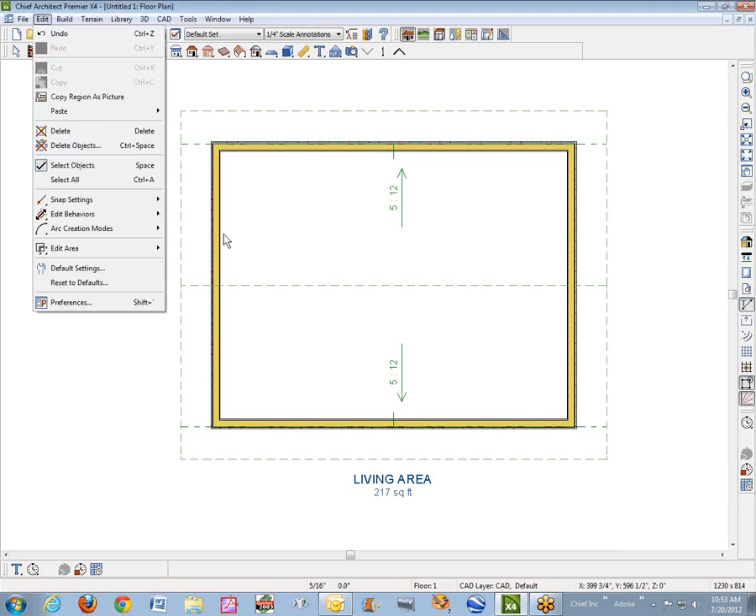Several things you need to do to get an open rafter, open eave kind of look. You don't have to have gable roofs, but the first thing you do is set the framing up. That's under Edit, Default Settings, Framing, and Roof Framing.

We want rafters to appear to be 4x10s, 48 inch on center. I'm going to get back to whether we have fascia or not later in this tutorial, but that's what I've got set up there.

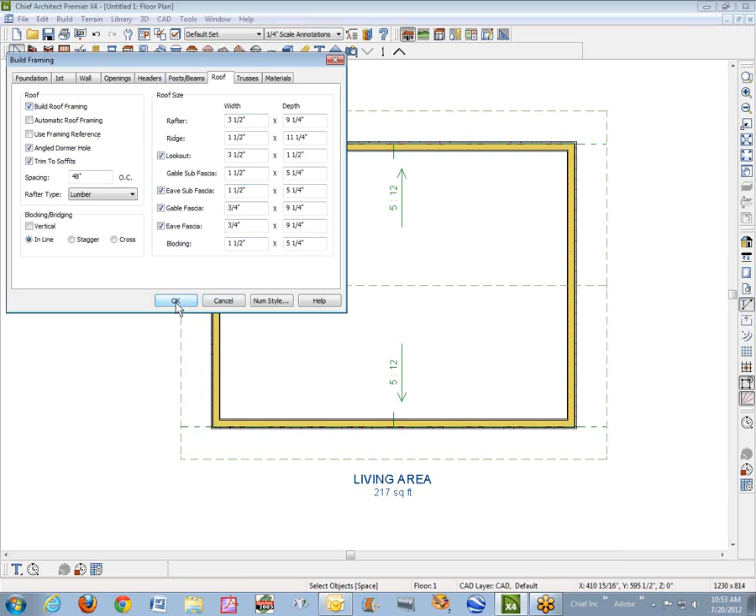Then we'll build framing. Now some of these methods I use to open dialog boxes aren't significant, but the actions are. We'll build the framing, yeah, I want it to show. Okay, so there's the 48-inch on center 4x10s.

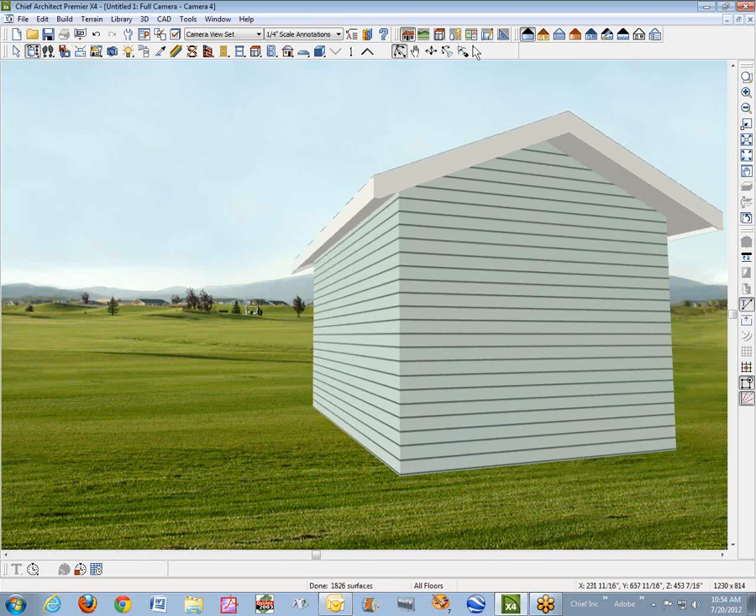Let's just take a camera view at this. Now the framing's there, but it's not showing. You can see that there's a fascia reveal there. Let me go to a vector camera. Okay.

So I'm going to open this dialog box of this roof and go over to, excuse me, the Options tab. This is what I missed when we were together before.

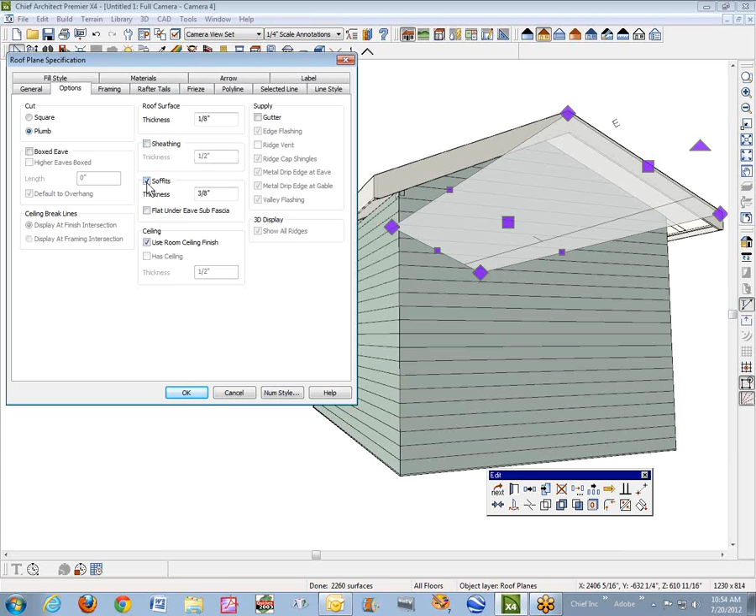I'm going to leave the sheathing. Well, I'm going to turn off sheathing, soffits, and ceiling. We'll just see what it looks like. Might as well just do this. Okay, so now I can see the shingles.

Right on top of the framing, which is probably not optimum. So let's open the dialog back up. But you should know that when it says sheathing, that's precisely what it means. And I think the default sheathing is OSB.

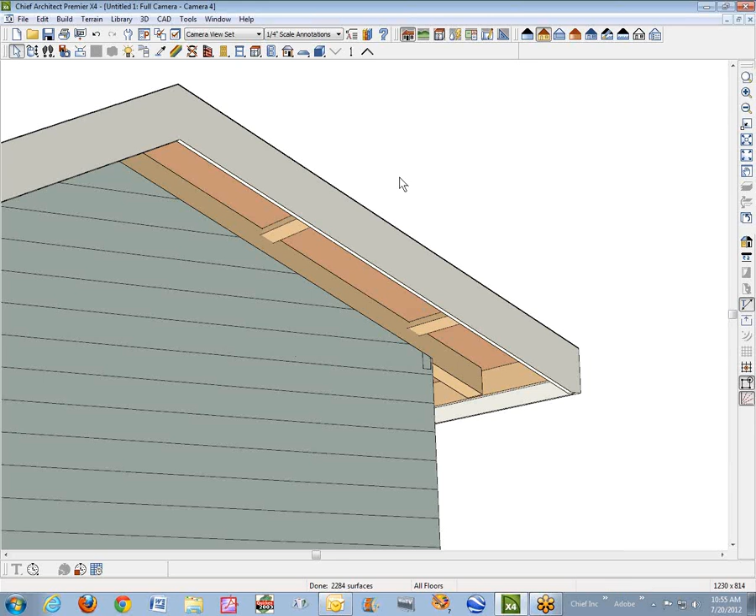Let me texture the camera. Yeah, which this is not exactly ideal in an open rafter thing where you're just doing an appearance. You don't want the raw wood and raw OSB. So...

And I don't know whether or not you want fascia, but again, that's a setting in the dialog. We'll go over here to framing and turn off the fascia. See, now it's just the framing there. There's the sheathing and the framing.

So it depends on the look that you want. On some you don't want the eave, on older things maybe you don't even want this over here. So we go back to the, see, now I'm getting the dialogue, so I have to click on the sheathing to get the dialog box open.

And we'll turn out, again, lookouts or no lookouts. Let's turn the lookouts off. You can see these little 2x4 things disappear. It just depends on what's there, what settings you use. And Chief has been kind enough to allow us dialog boxes and input boxes to control all of this stuff. So, oh yeah, okay, I want to go back over to...

All right, yeah, gable fascia we probably want. And you can't, I tried this, you can't turn on one and not the other. They just kind of go on and off together.

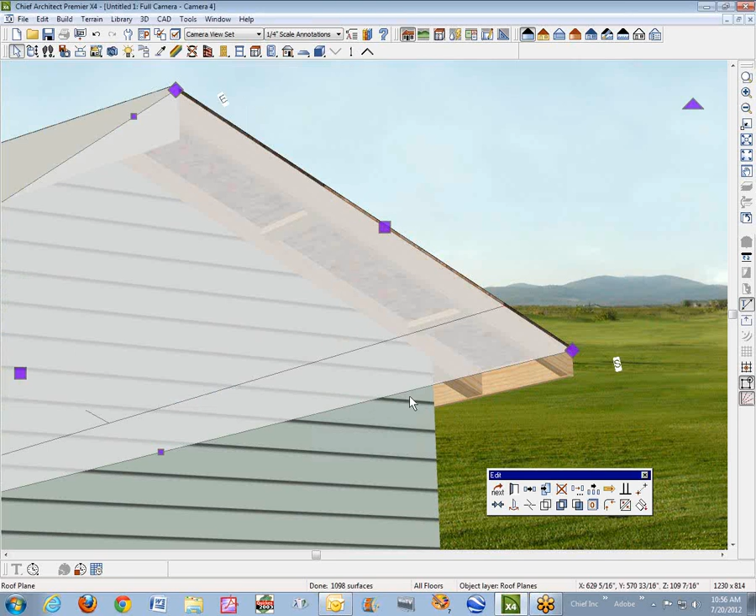So if there's no framing across the end, I would recommend you just select that piece and delete it to get that sort of look. And it looks like this piece is not 4x10, so we'll just open that up and make it a 4x.

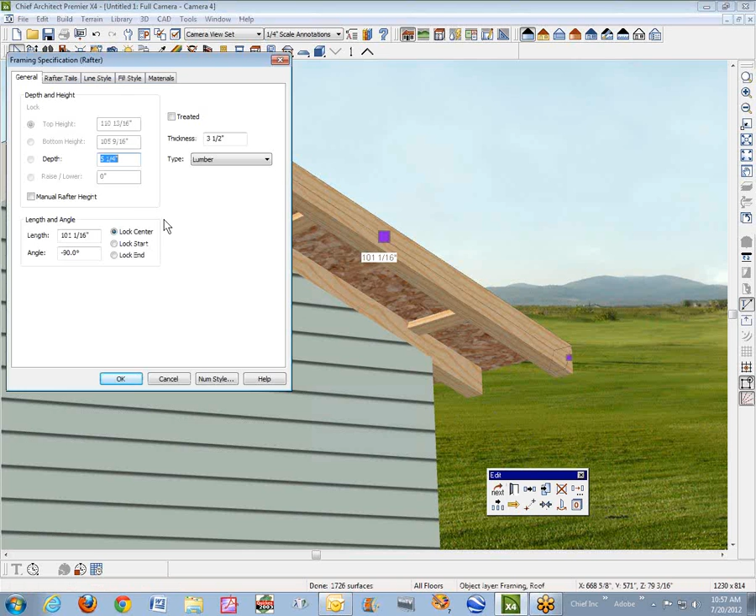I'm not quite sure what setting I missed, but now it's sticking out too far a little bit. This is how you control things to look like what you want them to look. Let's see, that's on the end of this house, and then that would be -X.

I'm going to select this and use this tool here, Transform Replicate, to move this object to the left in plan view 2 inches. I need to make it -2, don't I?

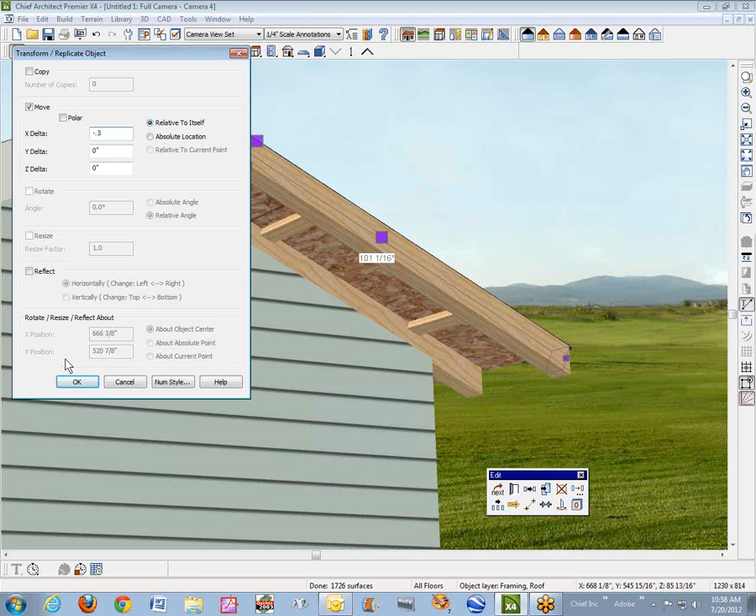Okay man, it's a little bit too much. Well, now I'll move it X 1.5 inches, see, a positive value. That's okay, this is how you get things done. You use the tools that are available. I'm going to move that back a half inch, -0.5. Okay, I'm happy with that.

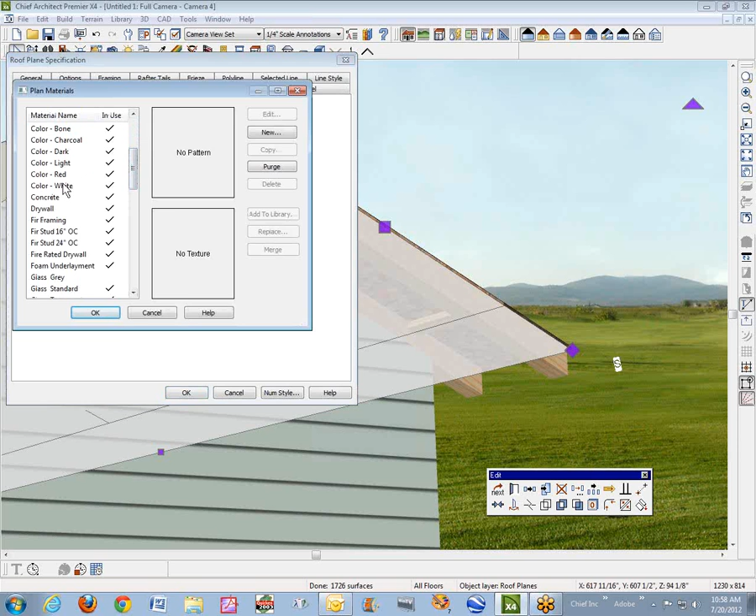Now the materials. I'm going to open this roof dialog here. I don't want it to look like OSB, so I'm going to go over to the Materials tab. Yep, and sheathing, change it from OSB to just white. If you're not worrying about the materials list, it just has to look right. That'll look better painted than it will be raw OSB.

Now the framing, I probably should have thought ahead on that, but I did this on purpose because sometimes you just don't think of all the steps in the right order. And go back to build framing. Build framing, there it is.

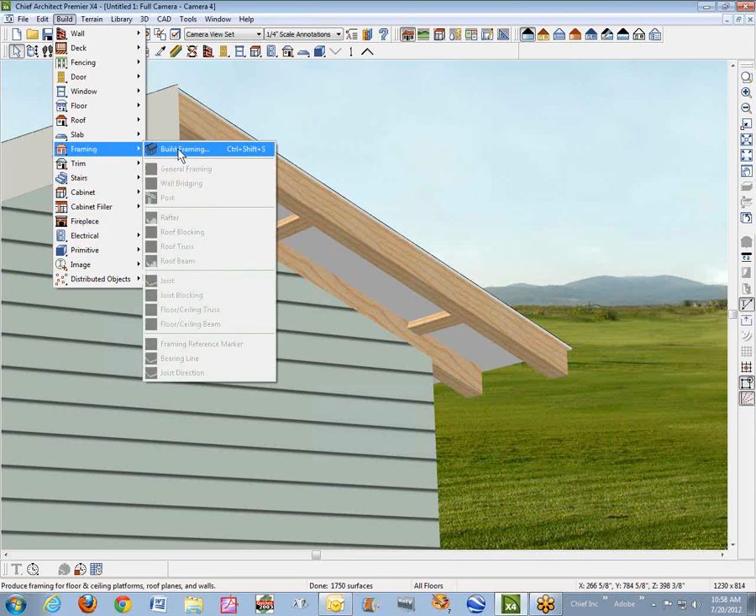We'll go over to the Materials tab for General, I'm going to change that to white. I'm not sure that this will be a retroactive setting. Well, we're fixing to find out. It is not retroactive, okay.

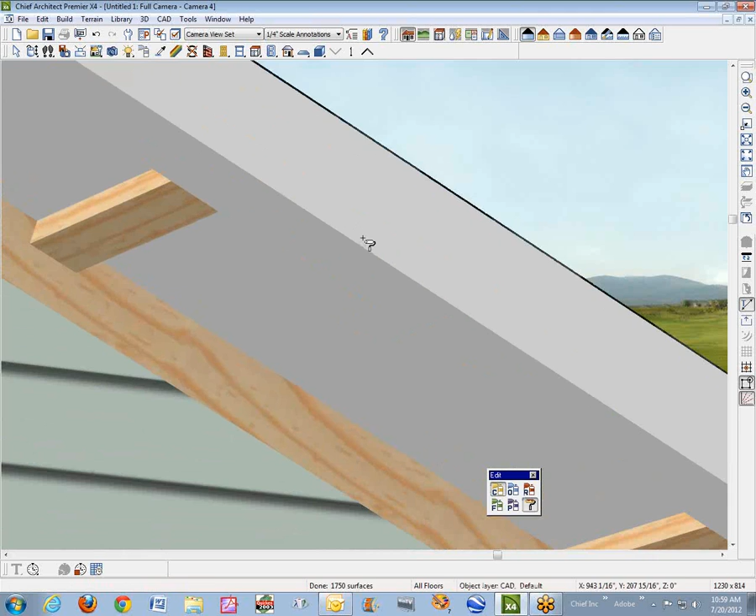So some of these things, it's obvious that it would be a good idea if you were to plan ahead. If I use the material painter, I think, okay, just put the material on there. Let me check that. I'm going to check it with the adjust material definition, see if it just made it white. No, it actually took the Fir framing and painted white onto the Fir framing, which may or may not be okay.

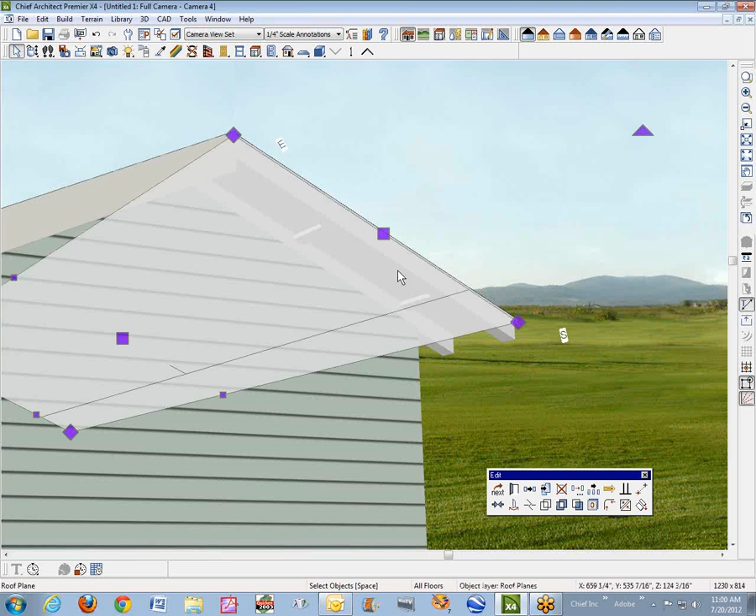Okay, looks like the settings finally caught up with what I wanted. And this is on this roof plane, I turned off the fascia. Again, it depends on how they built the house, the look that you want. If I turn it back on the framing tab, there it is, then it'll turn back on.

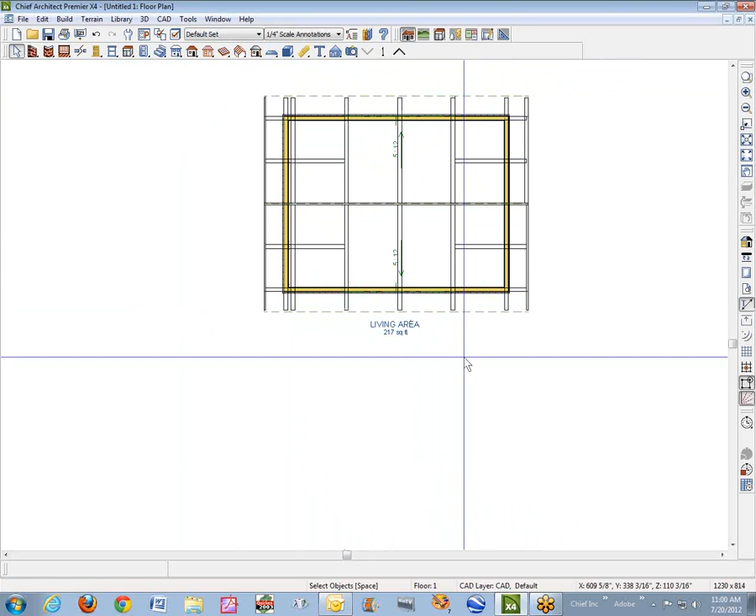So that's how you get the look that you want. Let's look at this in an overview, because I haven't done the other side. You can see I deleted a piece off of here. This piece is still there. Deleted off this side. So partly you're working with automatic tools, and then with the manual tools.

See, this one on the left, I haven't programmed. We'll take this, open the dialog for the roof, and we'll turn off - I've got lookouts on this side, so I'll just leave that on. But you can turn those off.

Okay, I missed something. Options, yeah. Sheathing we want to leave on. That's about it. I'm going to open this dialog box for this roof plane. If I'd set up the defaults for the white and white, then I wouldn't have to do this afterwards.

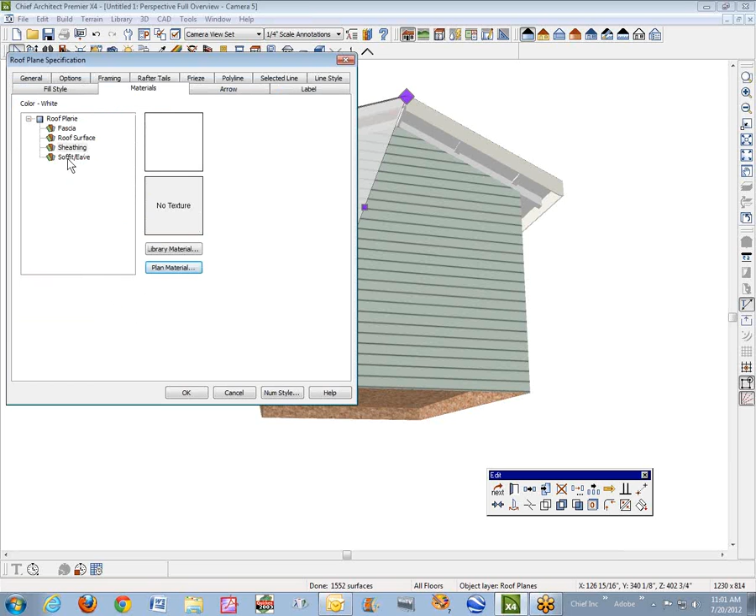I need to go to Materials, Sheathing. We'll go hit the W key - no, I'm sorry, I need to hit the C key for color in this case. White. And okay. So that's a way to do it.

If you want fancy rafter tails, that's what the rafter tail tab is for. We'll go over here and make these look the same. That's over under framing. Turn off the fascia.

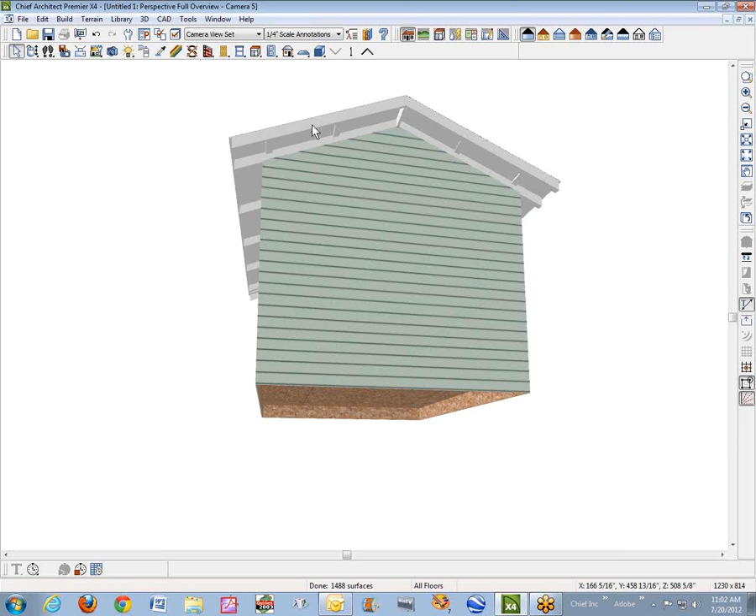Remember, I manually deleted this framing on the end. I don't think there's a setting for that, but as you saw, it didn't take very long to fix that up. Looks like I got a hole here. I can see under the roof - be play hob with squirrels and so forth.

Let me turn on the vector view so I can see better. And like the spacing here, you can adjust that manually. You can select and delete that if you want. Remember this one, I changed that manually from a 2x to a 4x.

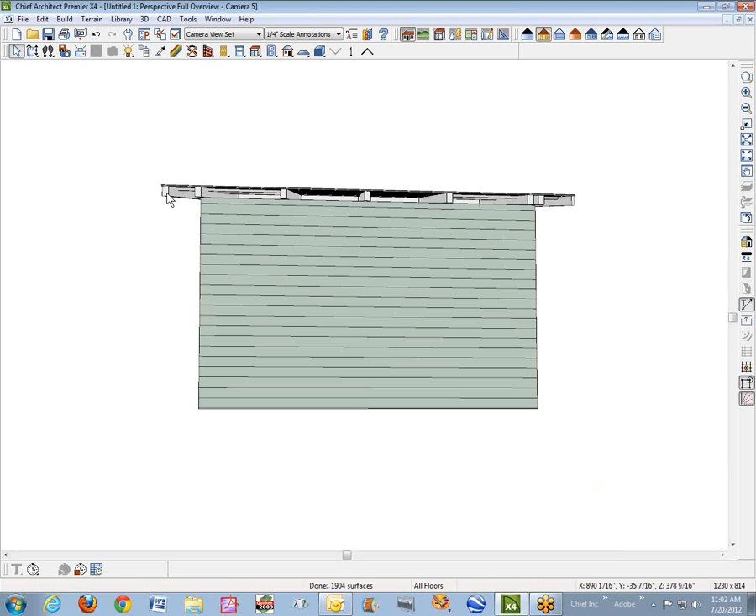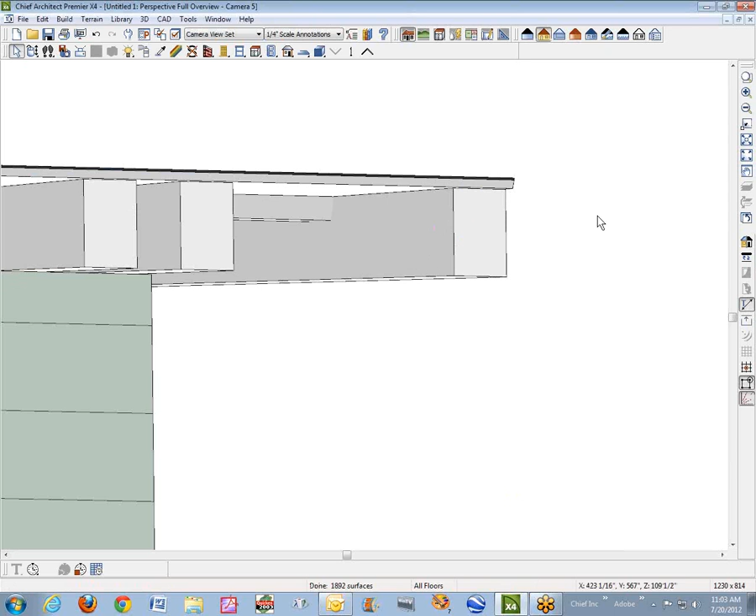It looks like I'd have to do the same thing on this end. See that? There's a piece right there. Yeah, here's this thickness. And of course, it'll stick out some. I think in this camera vantage point, I can just move it back. If you want preciseness, then I would use the Transform Replicate tool - probably don't need that one.

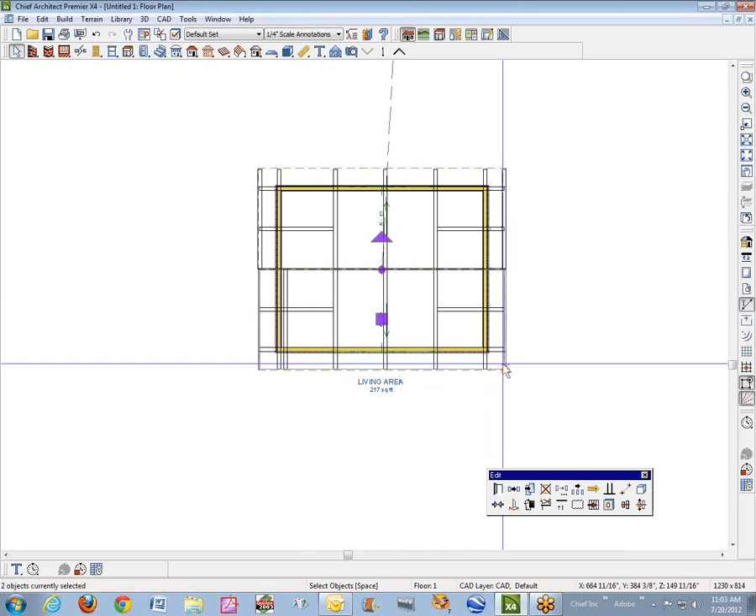Now, for this little space in here, if that's a problem, then tell you what I could have done - I just didn't think of it. Yeah, I need to do that one and that one. I'm not quite sure, I better do these one at a time.

See, again, it just came in automatically at 2x. I can just use this point-to-point move, I think, to move it from the edge from there to line it up with that edge.

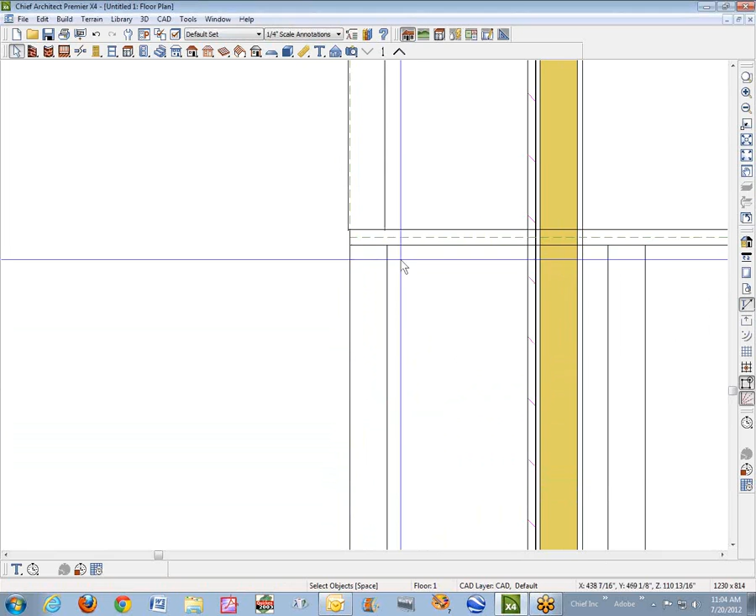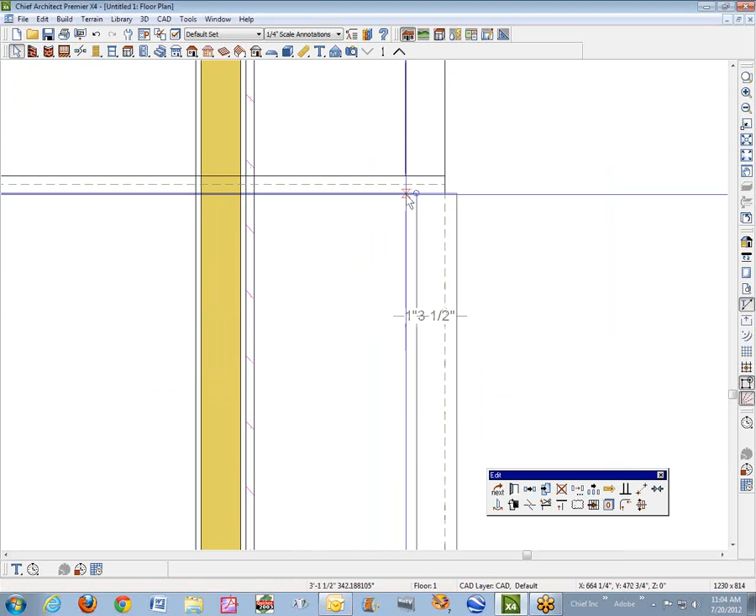See, all of this stuff's not hard to do, but if you don't do it all the time, I understand. This is what it is. Okay, I'm using the point-to-point move tool there. This one, make it 4x. And then point-to-point move it from there to line the cursor up there.

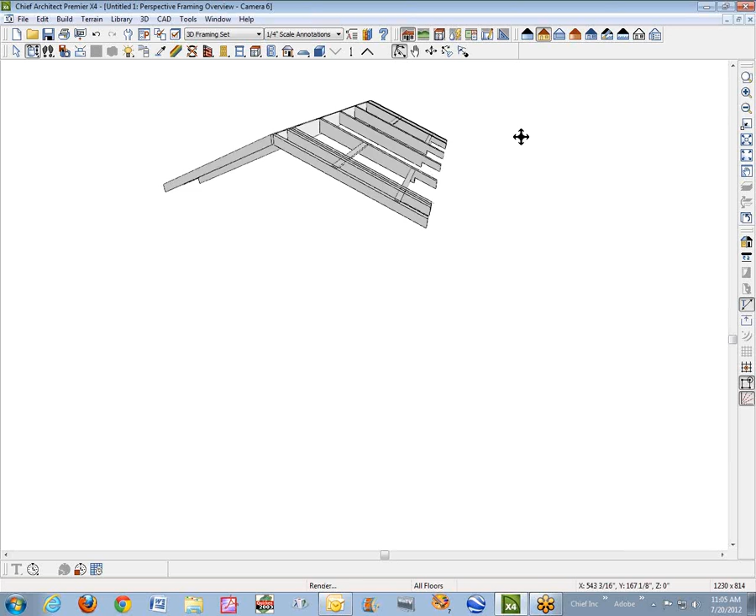And okay, let's look at a framing overview. This will probably be easier to see - that's the framing that's there. Boy, you can't see anything with all that white. There. Now, that may not all be perfect and so forth, but I need something to cap the edges of the rafters where they get

reduced. I'm just going to use the general framing tools. Build, framing, where is it? There it is. And I want in this case, a joist. So where's the joist tool? There's a joist. I'm going to draw a joist along here.

Left click drag. Yeah, turn them on. And then we'll go back to the camera view. Let's see if framing joists on. Framing, ceiling - I don't see it yet.

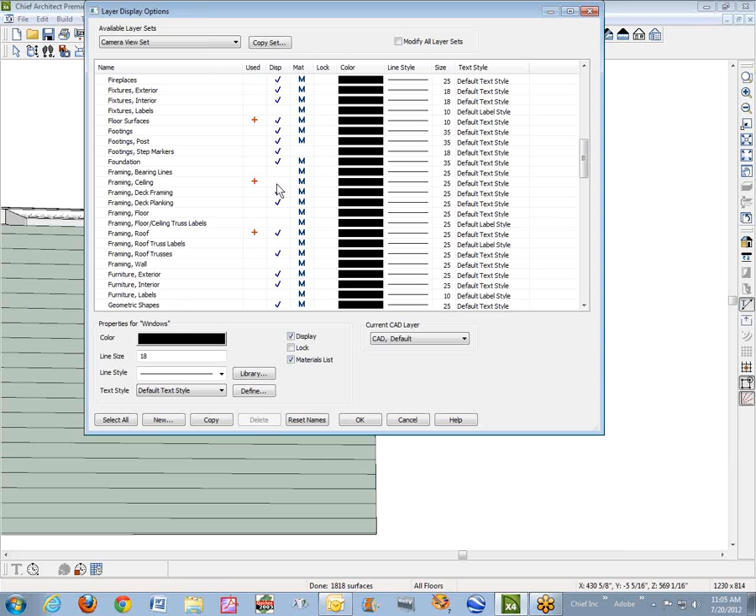Framing ceiling, it's turned off, that's why I can't see it. I don't see it. I drew it there. Is that it? No, it's a wall. Let me hit the tab key. That should be it.

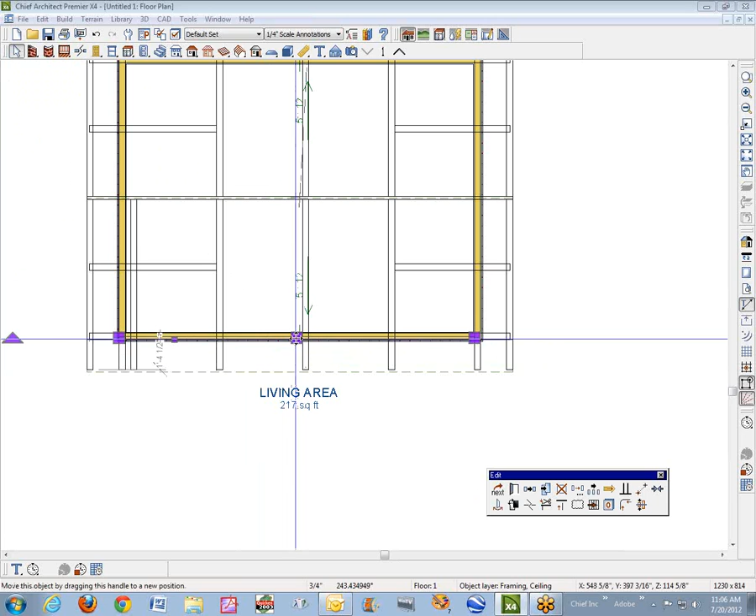There's no open icon. Framing, okay. Thickness, height, that's probably about right. I'm not sure about the bottom height. I'm just going to pull it out here where I can see it. It should be in the right place, but I'm not seeing it. So I'm going to separate it from the wall. Now, I must be looking at the wrong side. There it is. Okay.

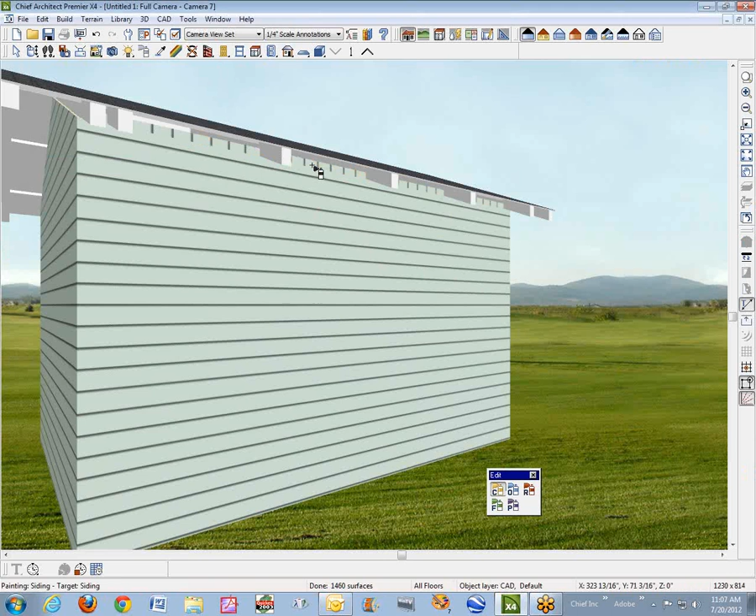It's like a soffit or a polyline solid or anything else. You just draw the thing and then make sure it goes where you want. And just use the eyedropper to get this material over there from there. Oops, wrong material.

I'm going to open the dialog box and straighten this out. That's one of the reasons I don't like the eyedropper tool, because it can quickly get you into some trouble. It's oftentimes easier to just open the dialog box, set it to the material you want, and then drive on. I want this a little bit taller to fill in that gap. This is just for an appearance, so okay, you get the idea.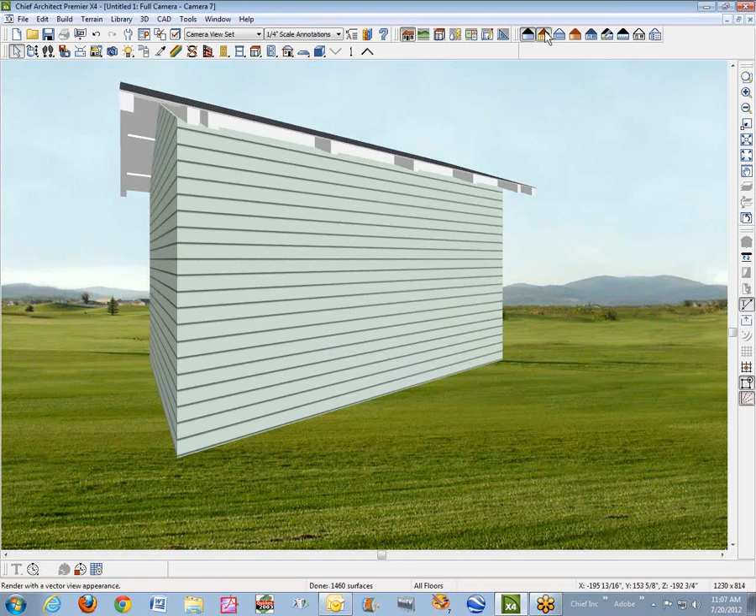So I think that's the end of the tutorial. Because that's pretty much, I think, the look that you want. And you can kind of see that it's all in settings, and then setting materials, a little bit of manual editing. And you've seen the house - I haven't seen the house, but this is the general steps on how to get this kind of an appearance. And I hope it helps you and others. Thank you.